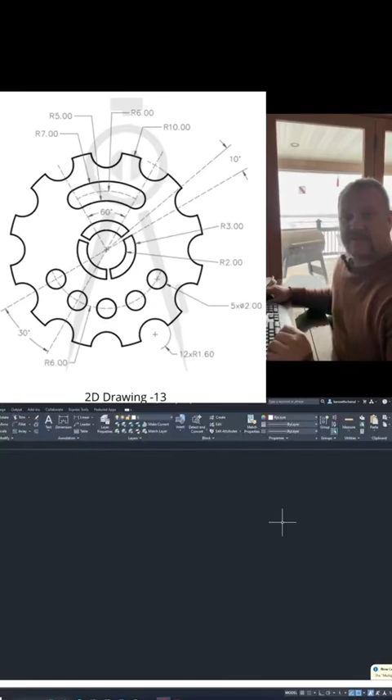We're good. All right, so this is looking like some sort of sprockets or something. I can already tell right off the bat there's going to be a bunch of polar arraying happening here. So let's just get our circles in right away. This one should be pretty quick, I bet.

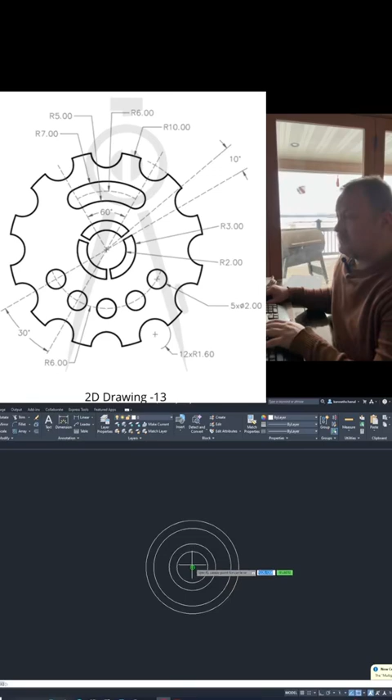So it looks like we got a radius of 2. We got a radius of 3. We got a radius of 5. Radius of 6. A radius of 7. And then finally a radius of 10.

So let's get these outer circles put in first. It says there's 12 at a radius of 1.6. So let's just get our 1.6 going. Looks like we can drop this right on the center.

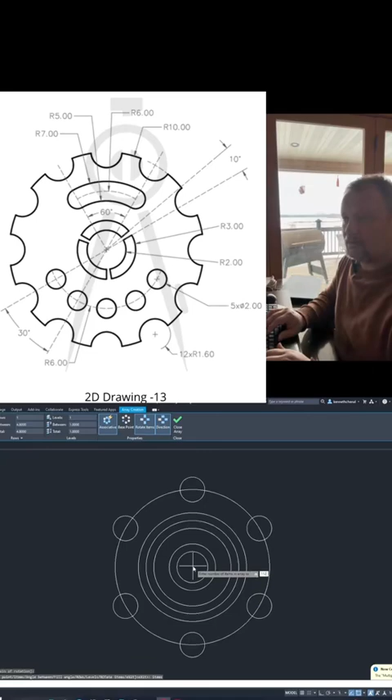Let's select this and do an array. Select polar. You want to select the center. Type in items, it says there's 12 total. Oops, not 112, 12. Enter.

Now we can go through and trim these out in the middle. I'm sure there's a faster way to do it, but I don't know it. All right, so let's explode this. If you don't explode it, it won't let you trim these out individually. So let's just trim this out real fast. All right, that takes care of that.

Now let's get these 5 at the bottom. It says there's 5 at a diameter of 2. So let's get our circle in, diameter 2. It looks like it goes on the 6, the circle that has a radius of 6 that we did.

And so it looks like if we were to continue this around, it would be a total of 12 of these 2 diameter circles with the polar array. So type in array, select your circle, select polar, pick the center, do items, and then do 12.

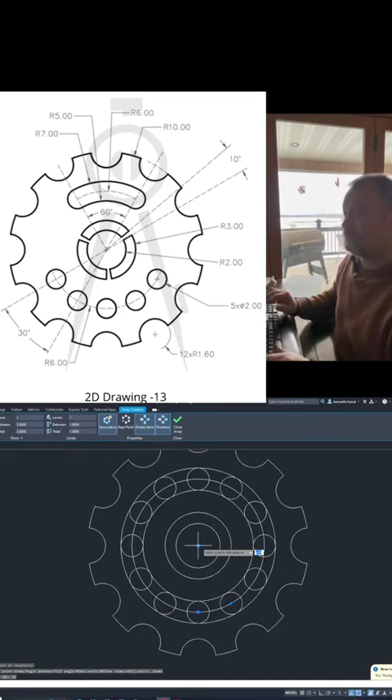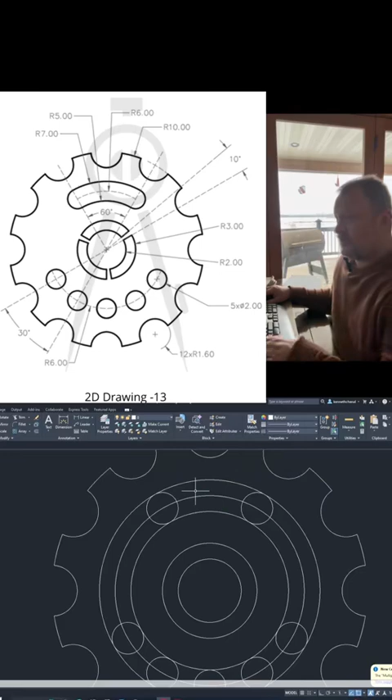All right, we know we have 5 down here, so first off let's burst this, or explode, either or. Let's get rid of these, and then it looks like there's 3 of them at the top here to make this shape, so let's leave 3 up there. And then we should just be able to delete the center one out and then trim out this shape here. And that takes care of that.

All right, now we just have these last lines here. So it looks like we can come from the center and go to... oh, we got to trim, or no, we just need to delete these. All right, now we need to come from the center to the center of this guy.

And we need to do... we don't even need to worry about that 30 degrees or the 60 degrees, we already have those in. I mean, we could just check them real quick just to be certain, so let's do that.

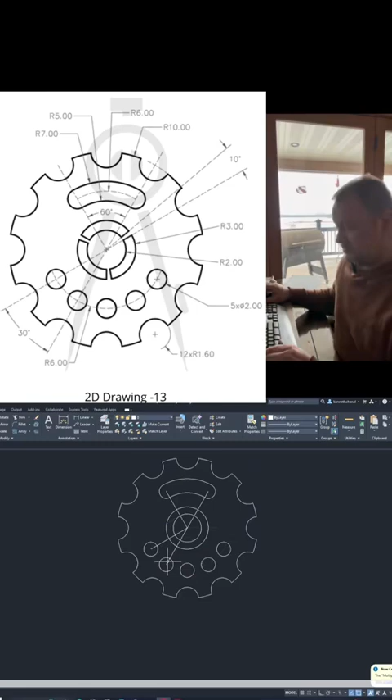Let's go to each point here and let's throw an angular dim on there. I'm sure we're going to come out right. Yep, we got 60 there. And if we do the same from here to here, throw an angular dim on. Dim, angular, select these guys. We got 30. Okay, so we're looking good.

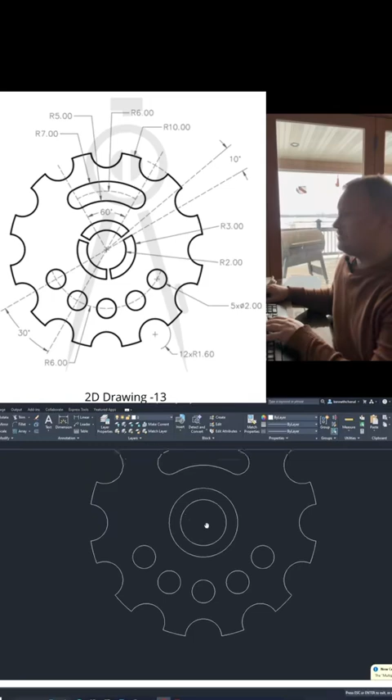Everything's looking right, so the last thing we need to do is just add these little spaces around here. It looks like we just need to come from the center of this guy to the center here and type in rotate. Select the object, click the base point, and then type in copy. And now let's type in our angle, which is 10. And that gives us that right there.

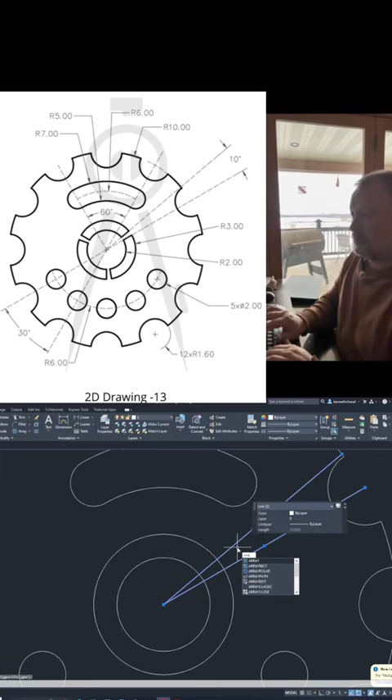So now we need to take these 2 lines and do a polar array. Select polar, select the center, type in items, 3, and that is how you do that. So let's just trim it out. Oh, remember, it won't let you trim a polar array unless you burst it or explode it. So let's just trim. Trim there.

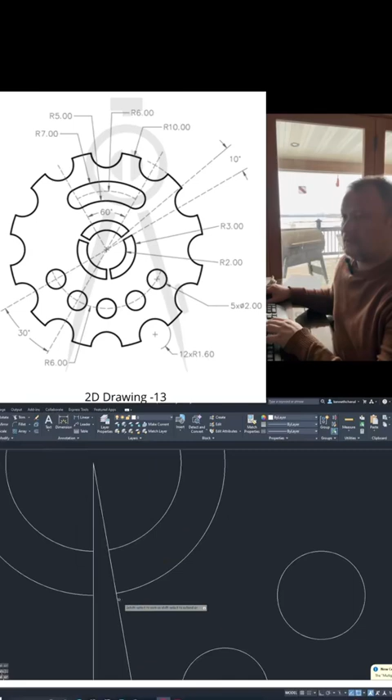This was a fun one, albeit pretty easy. And it looks like that's all we have there. And I believe, guys, that we have a finished part.

So the last thing we like to do, of course, let's extrude it. This one will be really easy to extrude because everything's already kind of there. Hold on, so let's type in join and just join everything together.

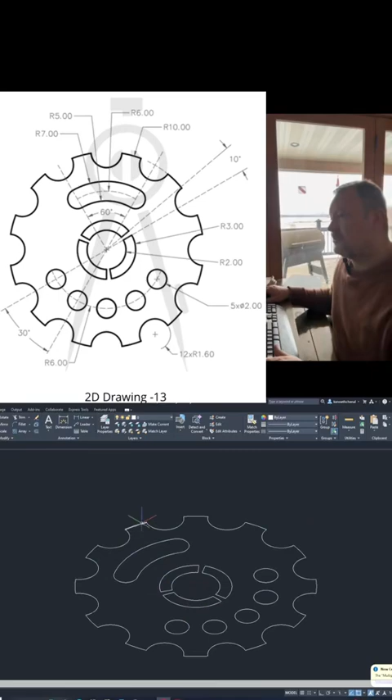When you do join, it takes it—before I do anything, if you select these, you can see that they're single lines, a single circle, a single line, just like here. If you type in join, it ties everything together that's touching in a closed fashion like that. So now we can extrude all this.

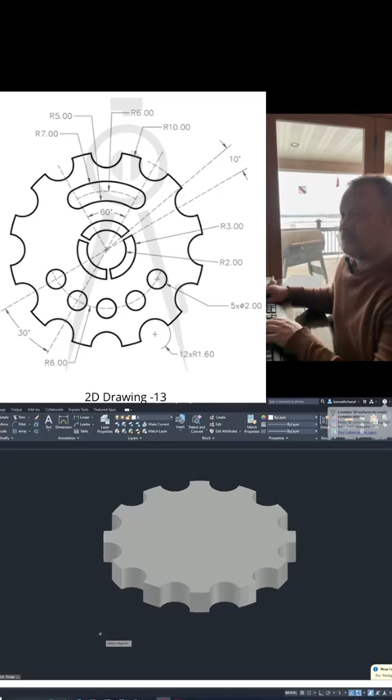We'll extrude it to 3. Let's do 2.5 minus 2.5. And then let's subtract. So let's just put it to hidden, you can't see what's going on unless it's in hidden. Let's subtract, and we can just grab everything, cut it out.

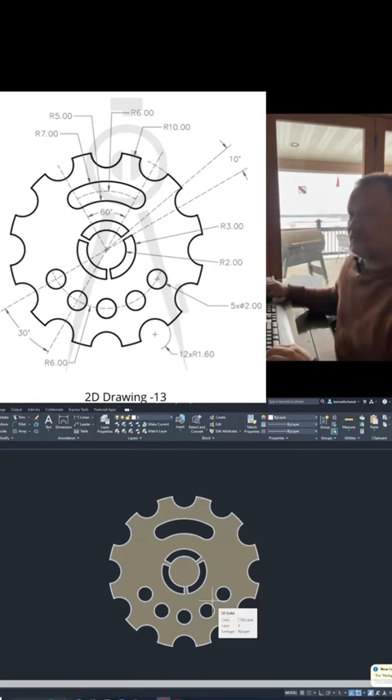Now let's add some materials to this. Let's make it brass. Let's go to shaded, look from the top. There we go, guys, that was a lot of fun. Yeah, you can spin it, do whatever.